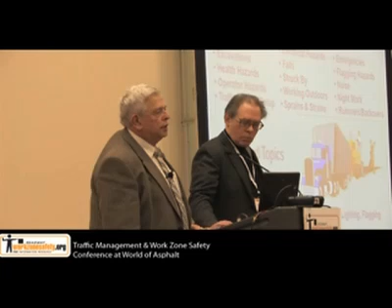We're going to show you what these things are. There are trainee booklets in English, Spanish, and Portuguese that take you through the whole course. We've got on the CD an instructor's guide, which is about 100 pages - probably will be more by the time we're finished revising it - that will take you as an instructor step by step with case studies, notes, and what you need to have.

Each of the modules has a set of what we call toolbox pamphlets, which replicate what's on the slideshow but are handouts so you could teach it to a work crew, or teach it module by module if you want to teach one every day, or however one wants to do it. It's very versatile.

We also have, which I don't have with us, a laminated presentation - a 14 by 20 flip book which has each of these slides in laminated form that you can use in the back of a pickup truck for a small crew. Each slide on the front side is in English; you flip it over, it's in Spanish.

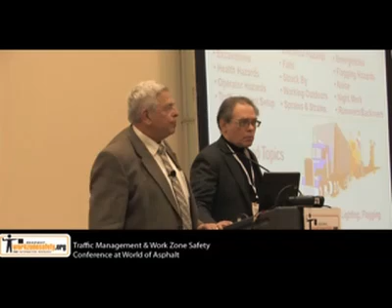Except for the laminated flip book, which you can request from the sponsors we talked about, everything else is all on the CD, and we'll eventually show you how to print it if you want, and how you work all this.

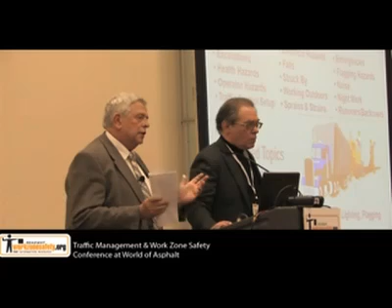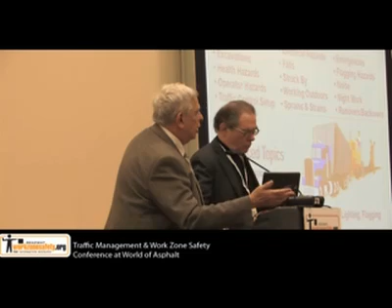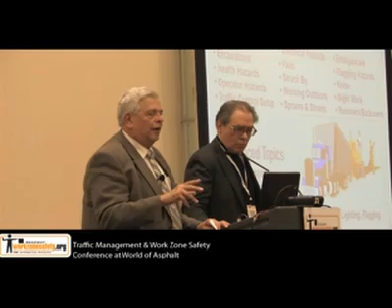Now, what's the content? If you look at this slide, you'll see we have 15 basic awareness topics, ranging from driving to runovers and backovers. Let me tell you how we came to those 15. They are a consensus of all these participants over a number of years, and we've pilot tested this beyond anybody's wildest dreams to determine what is the danger on the job, what are the hazards, what is injuring and killing workers on these work zone sites. I dare say you won't find much here that isn't covered by one of these modules. It has been vetted, tested, and so on.

We'll point out, and we're going to do several of these modules today. We can't do the whole thing because we don't have 27 hours. This was designed originally as a short awareness course. Like most things, you can still teach it as an awareness course, but it's also useful for anyone else - train the trainer, train the workers, train the supervisors, train the bosses.

We also have some more advanced topics - disaster response, typical applications, runovers and backovers, and a lot of new stuff on night work, because night work has become a very important issue. The modules are based on real-world scenarios, and you'll see as we go through that these are the real things that happen.

We also want to point out that it's multilingual - it's in English, Spanish, and Portuguese. When you go through the show itself, if you click on the thing that says voice, it'll talk to you. If you just want to push the buttons, it will recite what's on there - in English, or you click and it'll recite it in Spanish, click again for Portuguese, and you can flip back and forth. Very versatile in that regard.

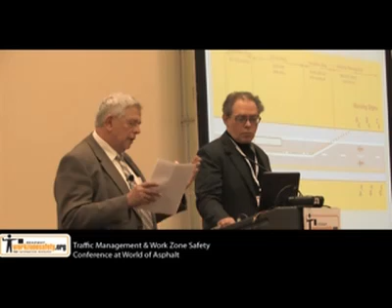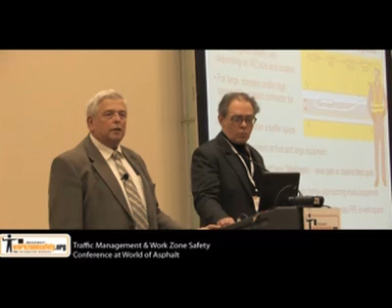We also have demos of access and egress - how do you set up a work zone traffic plan. We have information on just what people need to know when they're walking on a site they've never been before. We did a whole program recently for OSHA compliance officers - if they're going to go out in a zone, here are the things they need to know about that.

So I think that's probably the head of it. I'm going to turn it over to Rod Wolford, who will take you through how to set up a few of the initial things, like the options, but not actually do them - just show them to you - and then he's going to talk about the quizzes, and lead into our first substantive presenter, Emmett Russell.

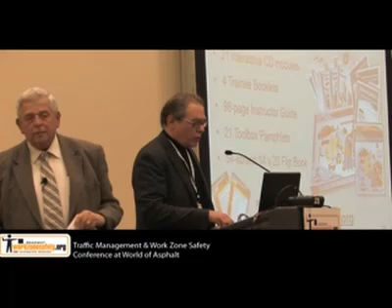Yes, well, I'm not going to take very much time here at all. I'm just going to switch the modes because we don't have a lot of time to go over how the program actually operates internally. But let's get out of this - we're already sitting here in the program. When you open up the CD, this would be the first screen you'd see. There's a set of tabs across the top, which includes setting the module order, downloading, setup screens, compliance, quiz, and so on. You have the option of setting any of these at any time to build a program for yourself. Beyond that, I'm not going to show you much beyond the module order.

You can drag and drop these modules in any order you want. You can save them, you can load them, so you can create your own specialized presentations however you want them to look. It has the ability to download modules.

As we do updates to the modules, if you click on this, it'll tell you if you have a web connection, and it'll tell you if a newer module or version of it has been placed out there.

Has a screen to set the size that it's going to appear at. Here's the compliance option. It allows you to show all states, or you can select from a list of states if you want.

And we're going to be doing the all states option today for the compliance. It also has quiz settings, and there are quizzes that go through this, and it works with the audience response system.

That'll be the last thing I say, is you have audience response systems out there with you now. I know some of you thought they were tasers or channel changers or something. In case you got tired of what you were looking at, you could just punch the button and change the script. It worked, you see.

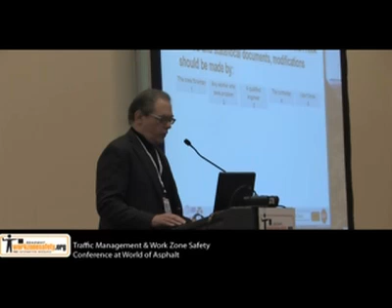We're up to 63, 69, 72, okay, 73, 75, and we will stop right there. Let's see how people showed out here. Qualified engineer is up in the 60% range, and we can see some of the others are spread out across the other areas. Emmett will be dealing with all these issues as we go along.

So here's our last question, oh wait, did we do 4 questions? You skipped number 2. Oh, did I? Well, I'm a bad guy. That's the way it is.

Right now the program is writing this information to disk, and we're just going to save it. The nice thing is that after it writes the information to disk, it saves it there, and we can go back and use this as a pre-post test for evaluations, because the controller numbers correspond to the file numbers. In this case these were handed out randomly, so there's no way to know which controller belongs to which person, but you can see that could be done.

Emmett, are you ready? You're comfortable, okay with this?

Good morning everyone. We're going to talk about runovers and backovers, which is our runovers and backovers module.

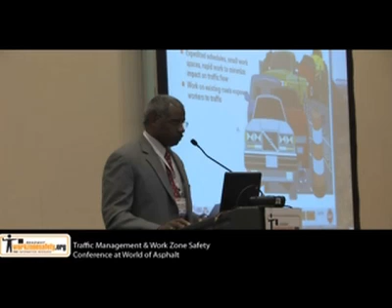Why are so many runovers and backovers? Mainly because roads are more congested. And again, you see the graphics come in where you actually show the congestion. Expedited schedules. Work on existing roads expose workers to traffic. More work zones. And again, the graphics actually show to help your workers understand some of what they actually have to go through.

Why are workers killed by motorists? Motorists enter the workspace mainly because they are unable to see workers, surprised by the work zone or the temporary traffic control setup. They ignore the warning signs. They're distracted or impaired.

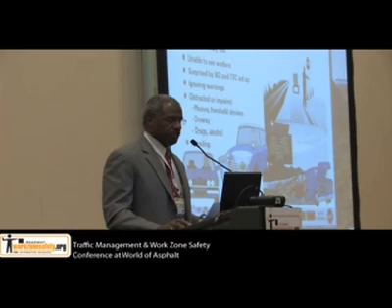And some of those distractions are what? Cell phones or handheld devices. They're drowsy, drugs, alcohol. And also motorists may be speeding where they're actually going too fast to actually make an adjustment. Hopefully you can see where just going through this program can actually help your workers understand some of what they're exposed to and some of what can actually happen to them in the work zone.

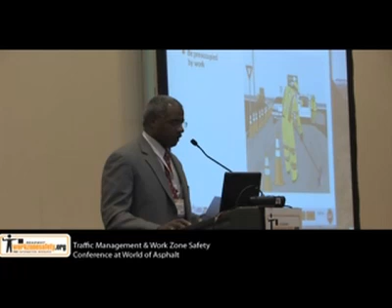Why are workers killed by motorists? Workers stray into the traffic spaces. And if you look at the graphics, they help you understand workers may be preoccupied by their work. Again, this worker, for instance, has their back to the traffic, not appreciating the risk. If you see the cones are all messed up, not in line, half turned over, having no convenient access to workspace.

Now this is a very interesting slide. You look at the work zone over here, and if you look over here, you find that everything the workers need is completely away from the work zone, where they actually have to go through the traffic space to get to it.

Again, you see restrooms encircled, food and water, and all of that is away from the work zone. Shade or break areas, staging.

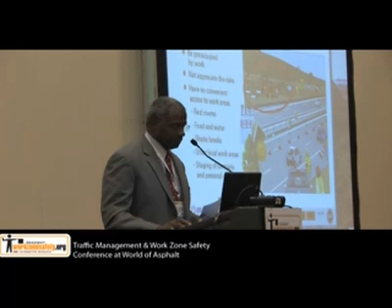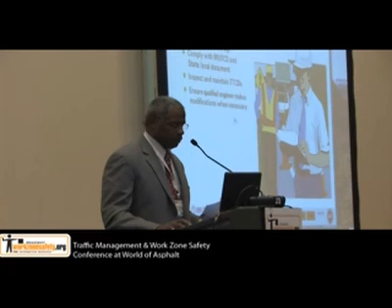How do we prevent runovers by motorists? Use proper temporary traffic control devices, setup and retrieval. Comply with MUTCD and or state local documentation. Inspect and maintain the TTCDs. Ensure a qualified engineer makes modifications when necessary. Retrieve, set up and retrieve in the correct order.

And wherever you see a number outside here, that's actually a demo. Let's show our first demo. Here we're showing the proper installation of temporary traffic control. You actually start from near the curb lane and you set up and block the lane as you go along. And here we have removal.

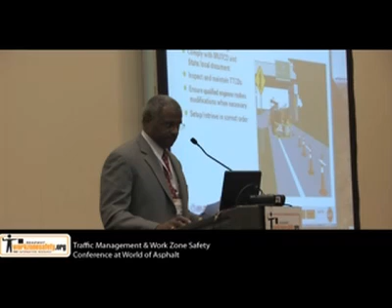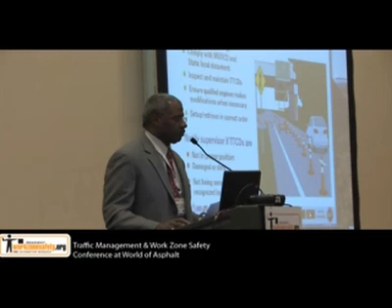Notify supervisors if the devices are not in the proper position, damaged or dirty, not being seen or recognized by motorists. And again, you're getting all of the tips you need to help keep your work zone safe. If you follow the tips and expose your workers to these tips, you'll have a better likelihood of maintaining the work zone in proper shape and also maintaining safety for the workers.

How do we prevent runovers, backovers? Workers must always be sure to be visible. How to be visible? Wear the appropriate high visibility garments. Here's another demo.

And here we have Class 1, Class 2, Class 3. Let me deviate right here. We passed out some information in front of you on increasing work zone workers' visibility through high visibility safety apparel. Let's go through that, and hopefully everyone has this handout right here. Class 1, for instance, we have Class 1 in our program, but clearly under the new federal highway guidelines, Class 1 is not appropriate in the work zone anymore. So anyone having a Class 1, toss it, can't use it anymore, you may as well get in step.

Class 2 is actually required for all workers. Class 3 is recommended. So again, the regulation mandates Class 2, Class 3 is recommended. And very interesting, on the slide, you'll actually see Class 3, examples of Class 3. You actually see the full suit, a jacket with stripes on the arms, and a shirt with stripes on the arms.

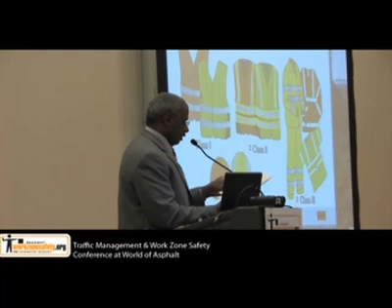On the next sheet, where you have guidance, it says for nighttime activity, high-visibility safety apparel is recommended for flaggers. In other words, it's not mandated, but for nighttime, it's recommended for flaggers.

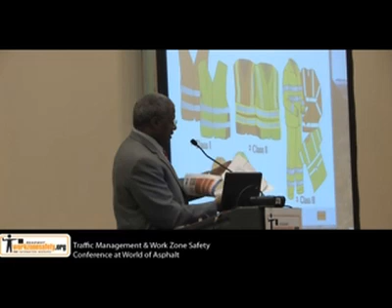Please hold on to this, and the most important thing is the kicker date. Remember that beginning December 31st, 2011, high-vis apparel is going to be required on all roads, all streets.

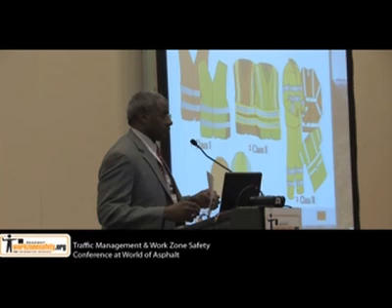Just wanted to clarify the confusion. The Federal Highway rule is not applicable until the date stated. However, OSHA is citing right now on that standard, so just don't confuse those two dates.

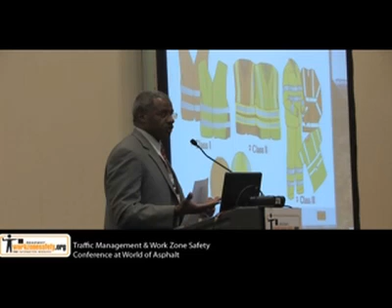There's a lot of nice Class 3 stuff that doesn't have full sleeves, just a half sleeve. So wherever you can use the Class 3 right now, it gives you and your workers an extra level of protection. Start investigating what your options are, and where you can use Class 3, please do so. But again, Class 2 is mandated, and Class 1 is trash. Any questions on that?

The safety supervisor will determine the type of garments. We've already talked about the FHWA regulation.

High-vis garments must be clean and in good condition, and here we have another demo that gives you some examples of what condition a garment should be in. If the garment is completely trashed out, don't use it. If the retroreflectivity is actually worn off, get rid of the garment and replace it.

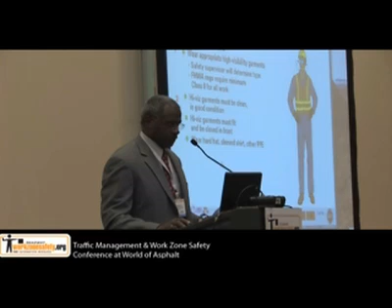Must fit. Recommending hard hat, sleeve shirt, and other PPE.

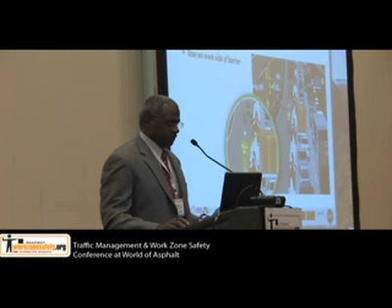How do we prevent runovers and backovers? Workers should stay in protected areas, work inside the barriers, know the proper paths, stay away from traffic lanes, and talk with others only in safe areas.

So clearly you can see where the program actually gives excellent guidance to your workers.

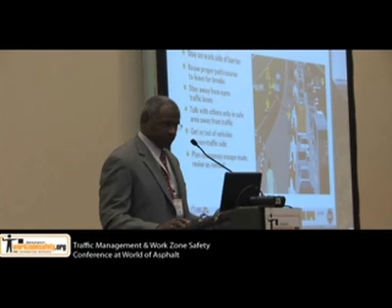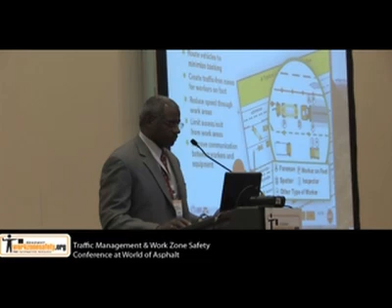Can an internal traffic control plan help? Yes. It talks about all of the items that an internal traffic control plan can do. Bottom line, workers must be trained where equipment operations enter and exit the workplace.

Now again, we have a couple demos here. In the program, there's actually an internal traffic control plan booklet. When you actually get here, you see all of the items that will allow you to print that booklet, and you can pass it out to all of your employees for additional details on how to set up and maintain an internal traffic control plan.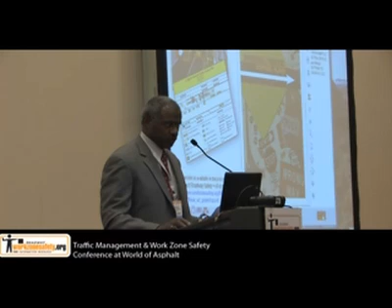Here is a sample internal traffic control plan. You can look at this sample, talk about it with your workers and engineers, and actually help design an internal traffic control plan that will work for your operation. Please take some time, study this, and you'll see where it tries to control the flow of traffic and minimize backing.

Backing is where most workers actually get killed by construction vehicles, and this gives you guidance in terms of how to properly set up an internal traffic control plan.

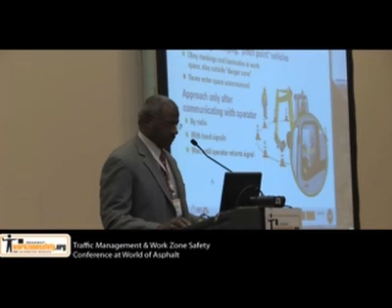How can we be safe around equipment? Again, you see the graphics: near moving, swinging, pinch point vehicles, and approach only after communicating with the operator. Again, a lot of good points there that you should pay attention to in terms of maintaining safety around construction equipment.

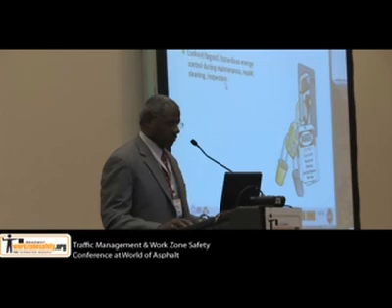How do we avoid being crushed? Follow basic rules to avoid being crushed by equipment. Again, we all know these rules, but it's good to be reminded of them and good to remind workers as to how they would stay safe around equipment.

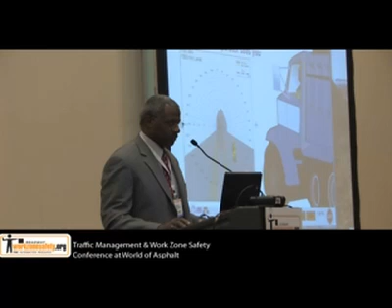What are blind spots? Areas where workers on foot cannot be seen by operators. Never assume the operator sees you. Excellent demo here - NIOSH has actually taken time and done blind spot diagrams for a number of pieces of construction equipment.

Let's talk about this truck here. What you see is 3 blind spot diagrams. The first diagram is what the operator sees on the ground or at ground level. The next diagram is what the operator sees roughly at the level of a safety barrel. And the next level is what the operator sees based on the height of a regular average person.

So you can clearly see that the operator sees different things. For the average worker in the work zone, it's very difficult to understand what the operator actually sees and what the operator does not see. This diagram helps convey that concept so they will know the areas where they cannot be seen by equipment.

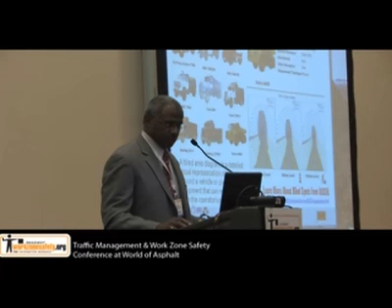If you can't see the operator's face, use devices that help eliminate blind spots. There's one more demo here that's very good.

Here you actually have an operator's seat up here, with the mirrors that the operator sees through. Here's a person standing in the back of the equipment. Where the person is standing right now, disregard how close or far they are from the equipment, and over here you can see the distance from the equipment. Clearly you can see that the operator cannot see the person.

As the person starts moving, you see that they actually come into view of the operator's mirrors. So another good diagram that can show workers what an operator can see from the cab, what they cannot see, and where workers should or should not be standing relative to the equipment. An excellent diagram to bring perspective on blind spots on equipment.

Why do we use backup alarms? Again, a good slide to talk about the importance of backup alarms and why we use them.

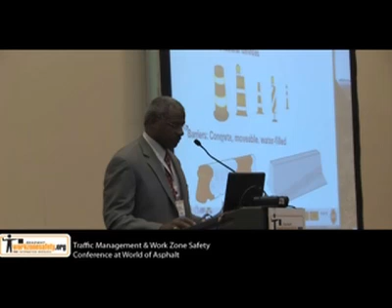Why must we learn about temporary traffic control device use? We must understand use, spacing, and maintaining, and it talks about the different types. These up here will not stop cars. These down here can.

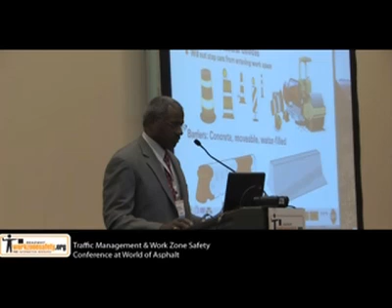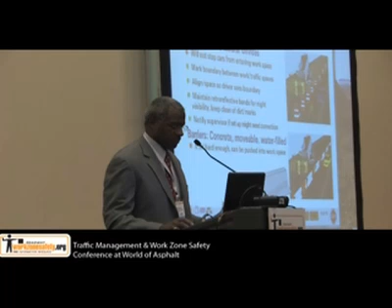Again, you can see a lot of good points in terms of maintaining your workspace and letting workers know the advantages and disadvantages of the different types of temporary traffic control devices.

What is a spotter? A spotter warns operators about nearby workers and hazards.

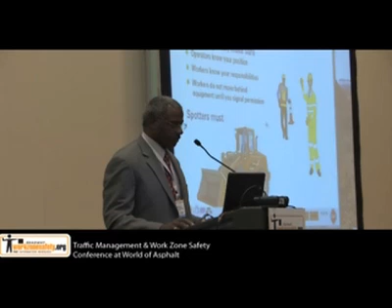What should you do if you're a spotter? Spotters must be trained.

What are the best general safety tips? The work zone is hazardous and requires you to be fully alert at all times. Here are the safety tips—again, all things we know, but good stuff to remind your workers and supervisors of on a regular basis, to remind them how to be safe.

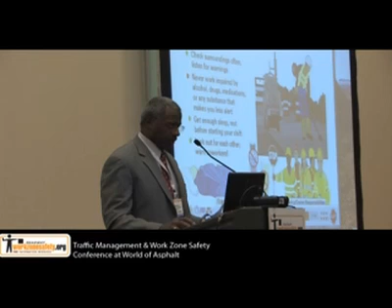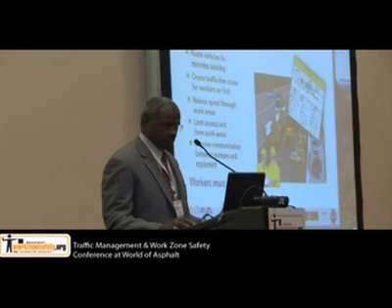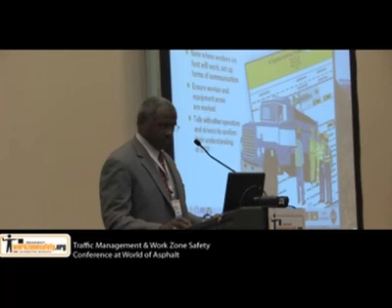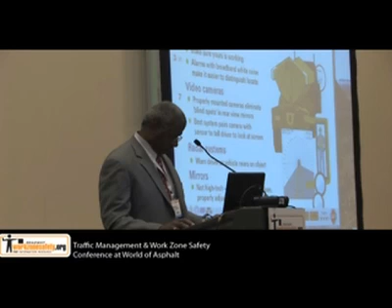Now down here we have a couple of tracks. If you want an audience of strictly operators and drivers, we have a number of slides that apply strictly to operators and drivers. Some of the demos are basically the same, but these are specialized slides where you can talk about run-over and back-over hazards, particularly with drivers and/or operators.

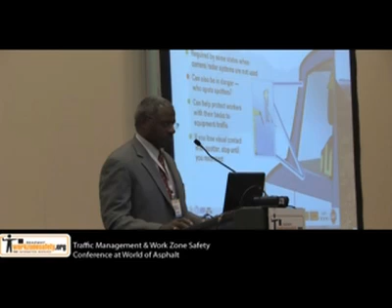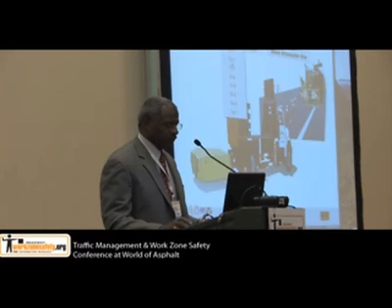Okay, I'd like to show you a couple of demos under the contractor responsibility section. On this demo we talk about attenuators. We have a number of applications where you can review how to properly set up an attenuator, and we also have one demo here. Watch closely.

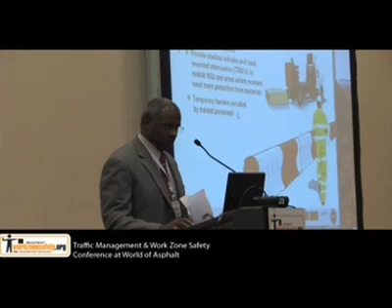Now the motorist was distracted by using his laptop while driving. Let me show that again. That's not going to go, but anyway, I think you can clearly see the value of the program in giving a lot of information on how to keep your workers safe and how to have everyone understand. And again, this is a section talking about the contractor responsibilities and issues.

Okay, with that I'd like to turn it back over to Rod so he can go through the questionnaire. Thank you very much. By the way, any questions? Yes.

I'm used to the term TTC, temporary traffic control. When was the 'internal' part of that injected into the terminology—internal traffic control, ITC? This sounds a little confusing, but it's the same thing, I just wanted to know that.

Well, I'm not sure, but since we started working on this program we've used internal traffic control or internal traffic control devices, and we found it was a good way to start the concept of getting contractors to think about managing not only what goes on outside the work zone, but also what goes on inside it, because as one of the slides said, 63% of workers are killed by situations inside the work zone, not necessarily by vehicles from outside it.

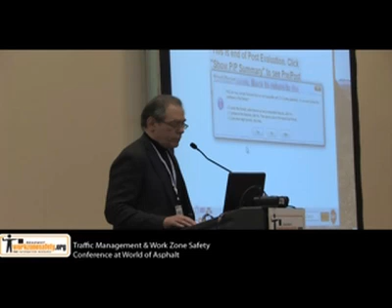At this point it's going to write it to the data, and after it does the writing of the program, then I will show a summary of the results. Then we'll move on immediately to the next module. So let's go pick our module.

That was runovers, backovers, plus. And guess what, did I make a mistake? Let's find out. I made a mistake. No results to show, because I missed that question number 2. Now you don't even know how well you did on the other stuff, but I guess you all know you did well.

Let's go on to the TTC basics here. This is the module that comes up next, and I'm just going to take you quickly through it. This module's purpose is to talk about the temporary traffic control zone, and what are the parts of a TTCD. A temporary traffic control zone has four parts.

Okay, let's see if I can do a better job of pre-quizzing this one. The area of a normal temporary traffic control zone that lets normal traffic flow resume is: 1, the termination area; 2, the activity area; 3, the transition area; 4, the advanced warning area; or 5, I don't know.

And we're up to 70, I'm going to get ready. I like to see us get to the numbers so we have everybody in there, and I'm not going to show responses again here because we're running a little short on time, so I'm trying to rush it along.

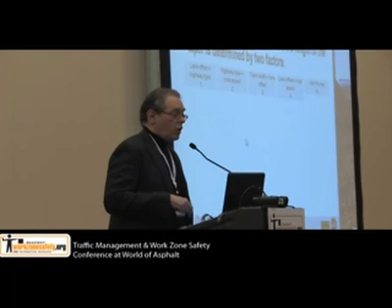Next question. According to the FHWA MUTCD, the length of the taper is determined by two factors: 1, lane offset plus highway type; 2, highway type plus road speed; 3, taper width plus lane offset; 4, lane offset plus road speed; or 5, I don't know.

And we're up to 69, 74, close, 76, okay. Good enough. Now at this point, we're going to write this one, and this time I did all 4 questions, so we'll be in good shape. I apologize for missing that previous one. Now we'll get back to the presentation of the module.

A temporary traffic control zone has 4 parts. If I were to click this link and we were connected to the internet, it would take us to the MUTCD document directly, since the program has several links to the MUTCD built in. But we don't have that connection right now, so let's close this and get back to where we're supposed to be. As an instructor, you can see we have 4 areas, starting in the direction of traffic flow.

First we come to the advanced warning area. What does it do? It tells us what's coming ahead, correct? How about the transition area? That's where we put the cones to move things out of the way. How about the activity area? That's where the work takes place. And the termination area? This is where we fire everybody we want to get rid of, right? No, actually the termination area is for a different thing.

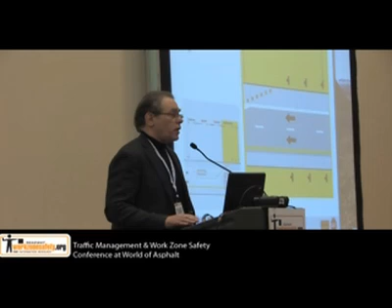In this module, you can click on one of these areas, and it will highlight the area with a number appearing at the bottom. You can then click that number to get a view of that area. What is the advanced warning area? It tells traffic what to expect ahead, exactly what it's supposed to do. What parts may it include? It will include advanced warning signs, and it will have 3 basic positions.